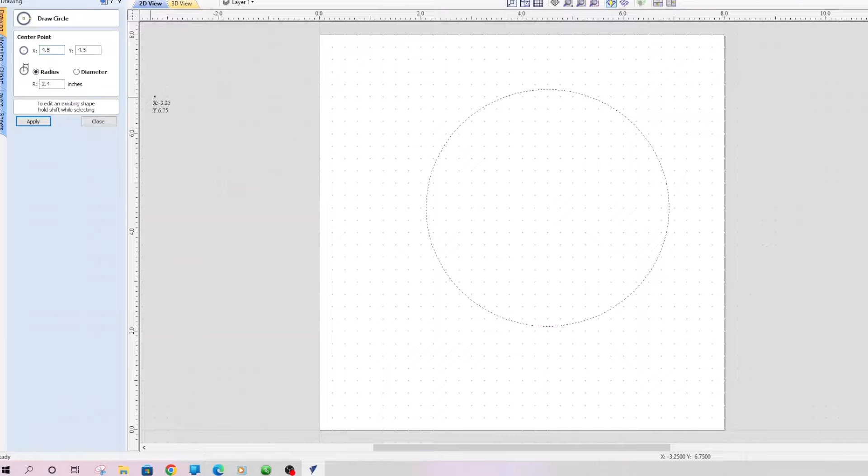Okay, so now once we have that, we have a series of tools here, and I'm going to do a different video on how to use the line tool, the arc, the curve tool, but let's go ahead and just start with a circle. What I can do is I can come out here and click and drag, and now you can manually type in exactly where you want it to go if you want to. So 4.5 tab 4.5, that's the center point. Actually it should have been 4 because we're not dealing with 9 inches, we're dealing with 8 inches.

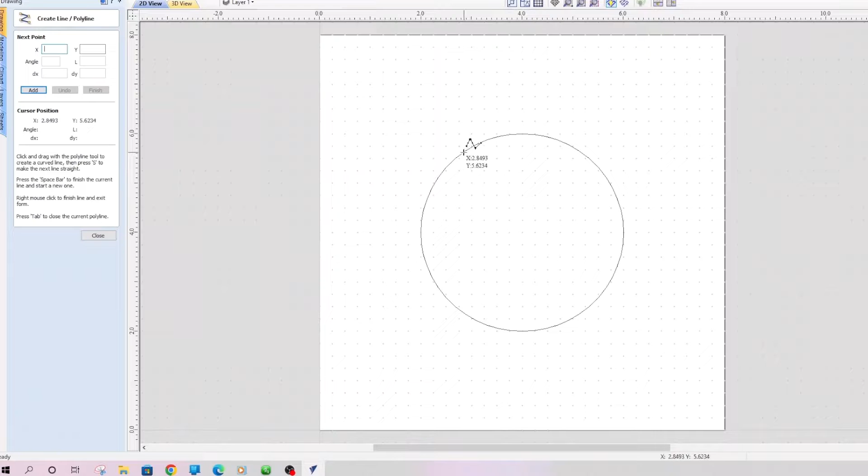Radius 2.4 inches. Let's say we wanted it to be 4 inches. The radius, no, I'm sorry, 2 inches. I was thinking diameter. So let's set the radius to 2 inches. There you go. It's a good coaster size right there. So I apply that and we close that. All right, so here we go. Now, if we wanted to, we can move it around. And there are other tools that we can use to intersect if we wanted to. For example, let's do the polyline. If I wanted to come in here and do something like this, I could.

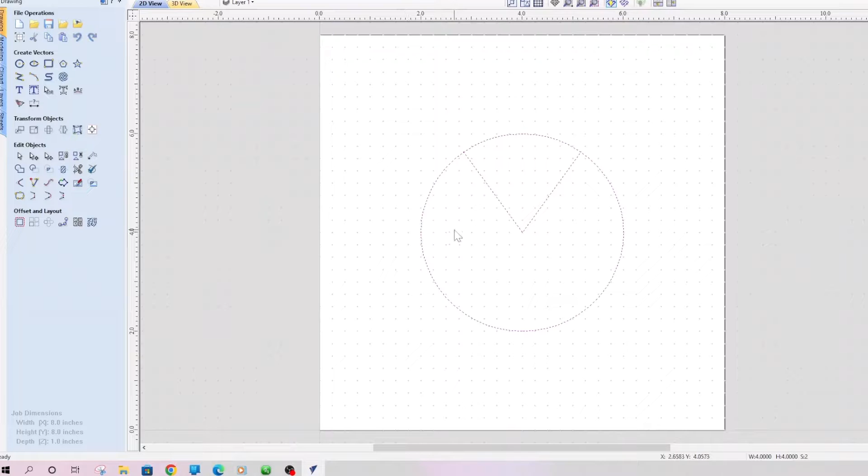Then I can actually come in and see, do I want to weld it together? I'm still getting used to some of these settings, so I'm not going to go deep into many of these. But if we did that weld right there, nope, that's not what I wanted. I want to get rid of that. I'll look that up, I'm not worried about that right now. I'm still fairly new to this software.

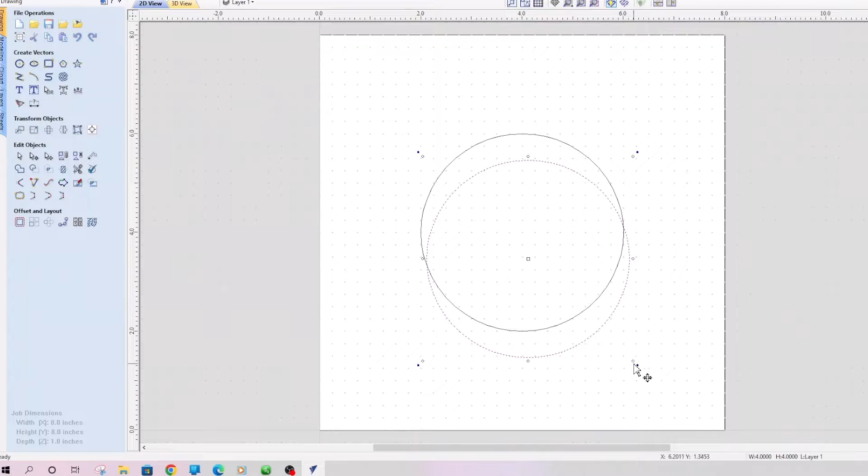So anyway, let's just go ahead and go with our coaster. Let's suppose I wanted that coaster to have a little bit of a lip to it. What I'm going to do is just copy and paste that. Now we actually have two coasters. And what I'm going to do now is resize that a little bit, make it just a little bit smaller, and move it into place.

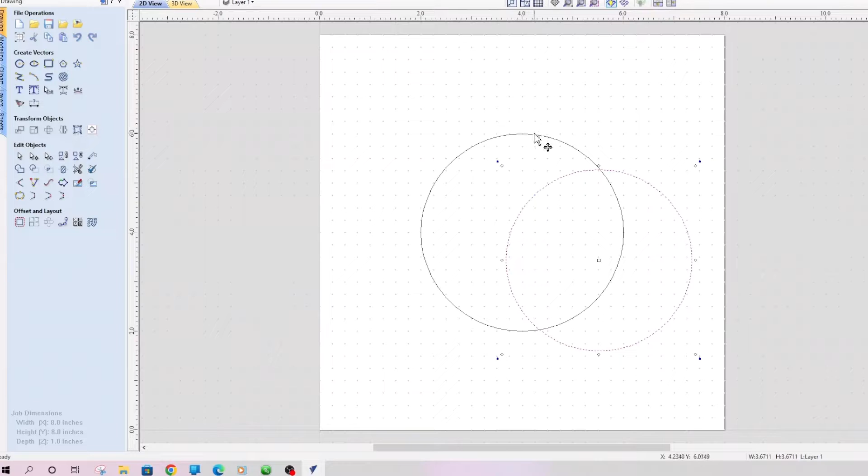Now here's a handy dandy thing for you. Number one, I'm using my arrow key to move stuff around, and that's nice because you can move it very precisely. Let me go ahead and select this circle, and I'm going to put that right in the center, and drag another guide down here also in the center, so that shows the dead center of it.

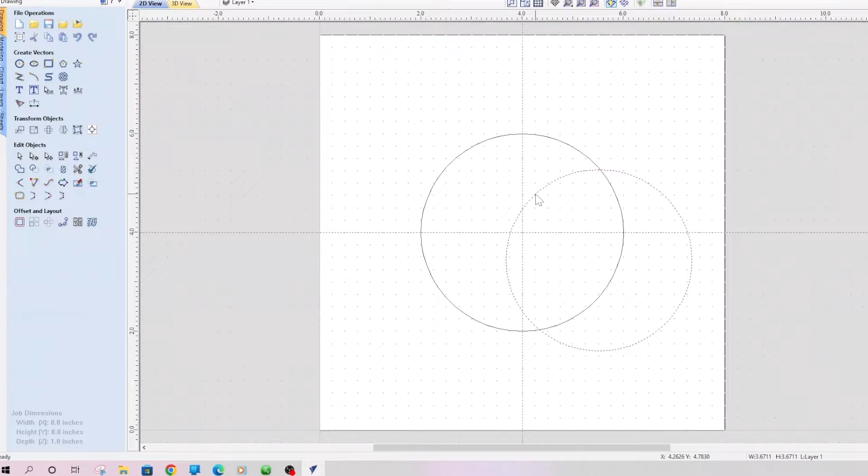So now I can actually grab this one. Let me manually just move it in here. Oh, I know what it is, I had the wrong tool selected, I believe. There we go, move it right in there. So now we actually have two circles that are totally centered.

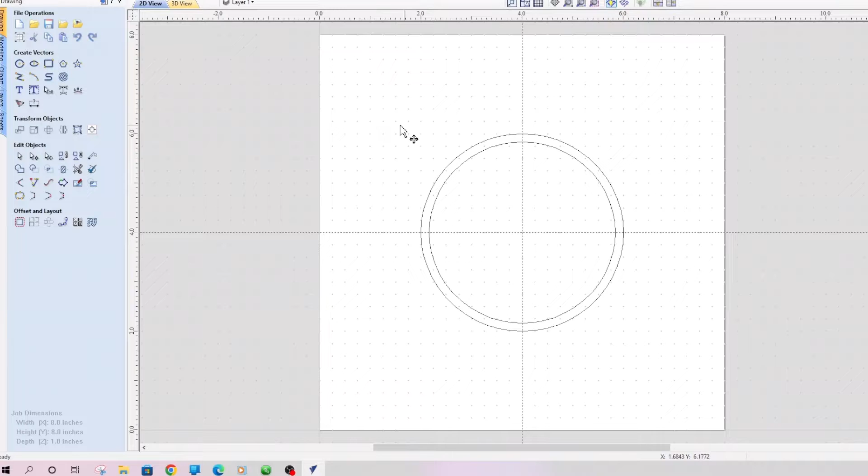All right, and we're just going to do a simple coaster. So to go into 3D view, we see absolutely nothing. So once we have our design done, and this is a pretty amazing design, I know you're impressed. Try to contain yourselves, people.

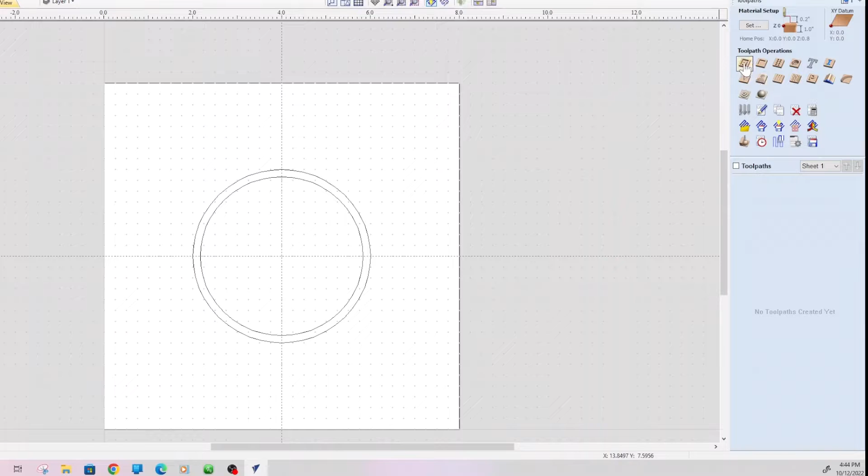Now we're going to go into the material setup. So the CAM side, we've done the CAD side, now we're going to do the CAM side. How do we want to do it? What do we actually want to do with it? If we wanted to make a pocket, we could do that, so the pocket is actually going to cut out a hole. And because this is a circle with no real tight corners, I can just as easily use a 1/4 inch end mill.

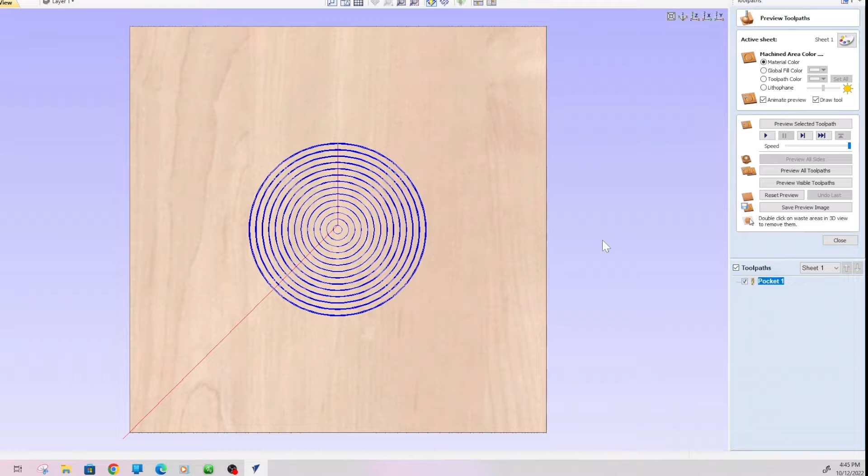So I'm going to go ahead and select that one, and I already selected a pocket toolpath, and let me select that inside. Then I'm going to calculate, and there we go. So if I go ahead and preview this, it actually cuts in, and then we can resize it and see. Now let's go back in there and edit that and see what we actually did.

What it does is it has 4 passes. So if I come in here and edit the passes, it's a 1/4 inch end mill going, excuse me, 1/2 inch deep. That's a coaster, I don't want it to go 1/2 inch deep. I only want it to go maybe, let's say, 0.125, 1/8 of an inch deep. So I'm going to change that, and then we'll take a look at these passes.

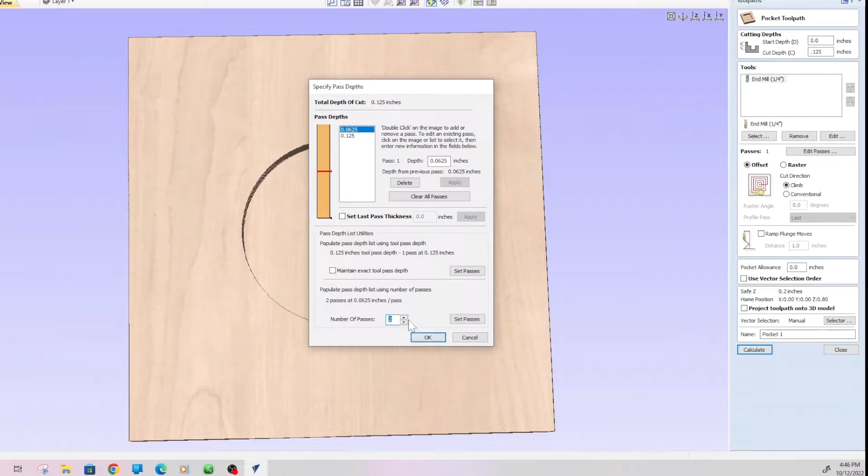By default, this 1/4 inch end mill is going to go 1/8 of an inch per pass. So if we wanted to do it in multiple passes, we could, but if it's a 1/4 inch end mill, 1/8 of an inch I think is more than fine, we can easily do that in one pass. So there we go. We can set this to be offset or raster; offset's fine since we're only doing one pass. That's all we got there. So let's go ahead and take a look, see if we want to adjust anything else here.

2 flutes, pass depth. By default, it's going to go down 1/8 of an inch, and the step over is going to be 1/8 of an inch. Basically, the step over is how far after it makes a pass, it's going to go over and start making another pass - how much is it going to step into the wood in that next pass. It's generally not a good idea, from everything I've read and understand, to go more than half the size of the bit. Since this is a 1/4 inch bit, 1/8 of an inch or 50% would be really what you want to do.

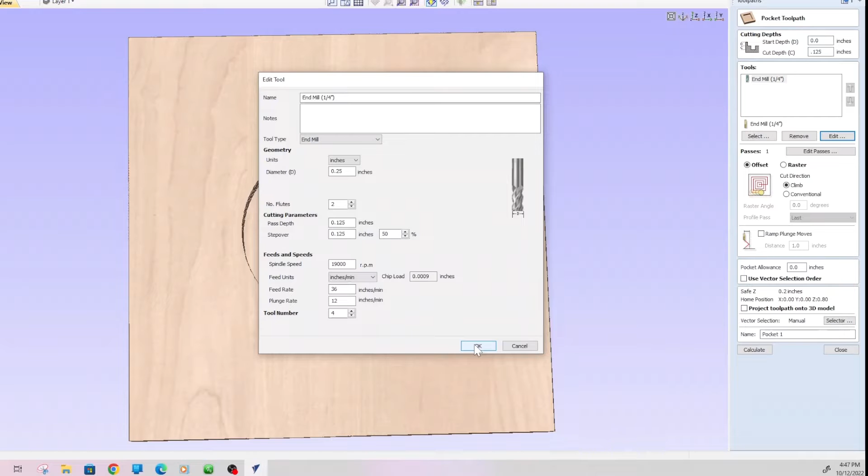It gives you a default spindle speed, feed rate, plunge rate, and it pulls that based on the type of material that you set and the type of bit that you're using. So I generally leave those alone. I don't know enough about them to be able to override them, and I don't want to break a bit or cause damage to my CNC because I decided to act like I was smarter than I am and make a change there. So click OK, and let's go ahead and calculate that.

Now what you'll notice is that, man, that's still awful deep. Is it just - oh wait, you've got to reset the preview. So before you go to preview it again, you have to reset that preview. That gets rid of the previous one. I always forget that. There we go. So now we can see that it's only 1/8 of an inch deep.

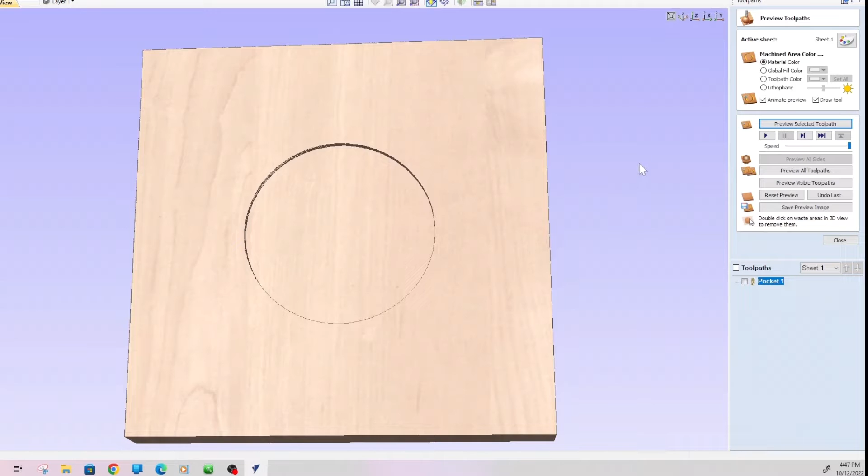Okay, but what I also want to do is cut it out. Since it is a circle, I want to go ahead and use my CNC to cut out my coaster. So what I'm going to do next is close out of this, select the outside, and now I'm going to do a profile toolpath.

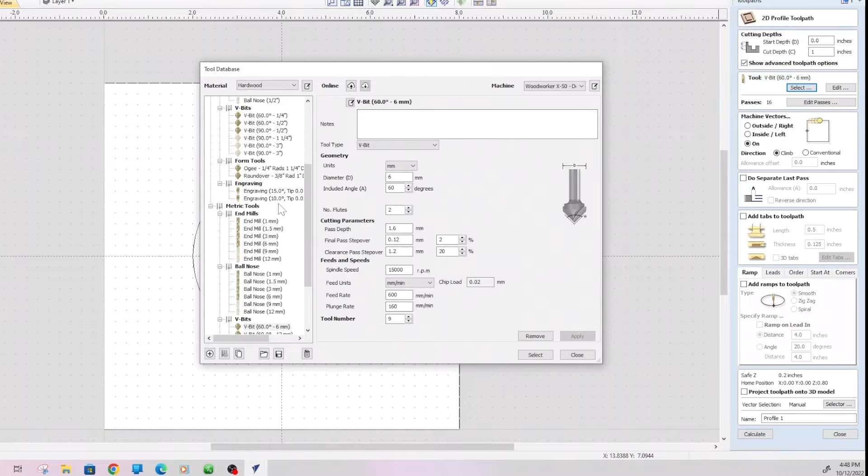Now the profile is not going to cut a pocket like we just saw. It's actually going to cut along the line. So for this one, the cut depth, since we are going to be cutting it out - I normally wouldn't have a 1-inch coaster, but I think that's what I designated - so the cut depth is going to be 1 inch. I'm not going to use a V-bit, that's for sure. So I'm still going to use my 1/4 inch end mill.

And notice how it has 8 passes. I don't think we need 8 passes. I'm just going to change it to 4 passes. That should be fine. So that's going to have 4 passes. That's going to speed it up a little bit.

And do we want to go right on the line? Do we want to go inside or outside? I think I want to go outside the line, because what I want it to do is keep that line there, but I want it to cut out the coaster. All right, so it's going to go all the way through.

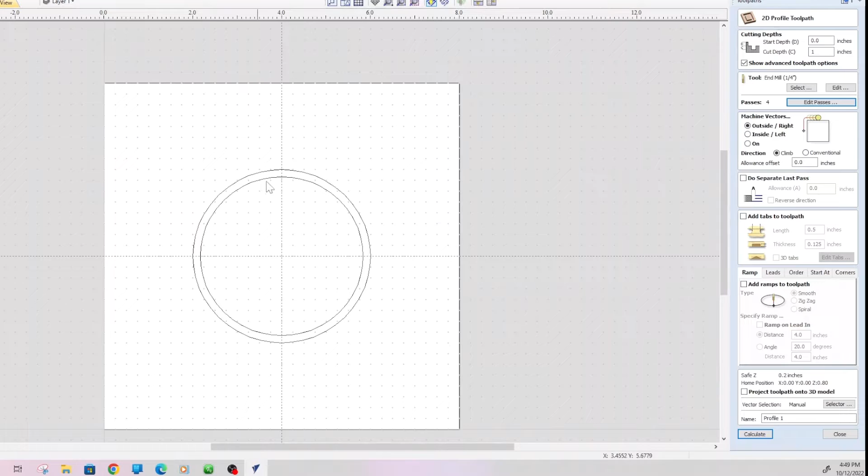And let's see, add ramps - we don't need to. You can add tabs if you want to. Since we are cutting through it, you're going to need a way to hold your coaster in place. So if you want to add tabs, you can. Typically what I do is I'll use the old CA glue and tape method. If you've watched any of my other videos, you've probably watched me do that. The entire piece is going to be held down onto my spoil board anyway, so even if I cut all the way through it, it's not a big deal. So I'm not going to add any tabs. In my opinion, tabs is just another piece of work.

So then once you're done, you've got to cut those tabs and sand everything. I like just using a piece of tape. It's not that expensive, and it saves time.

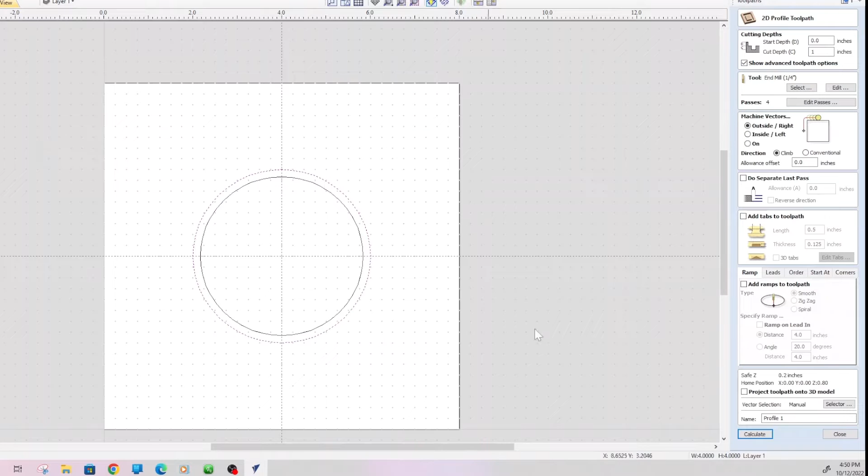So I'm going to go ahead and calculate that. No suitable vectors are selected. So let me select that and then calculate, and you'll see it shows it right there.

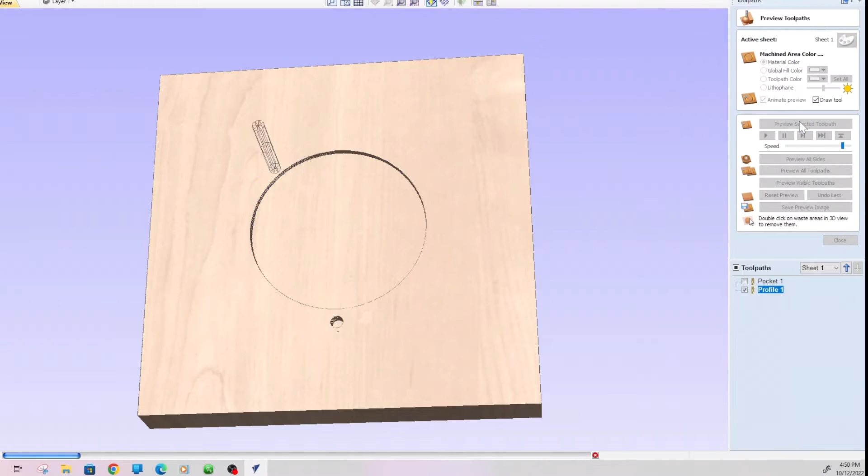Let's go ahead and notice how it's still got the other one in there, right, so it's still got our pocket there. So if I go ahead and preview this one, I'm going to slow it down just a little bit. Preview selected, notice how it goes right through, and it shows us that it does go right through. All right, so now we have our pocket, and we've also cut out our coaster.

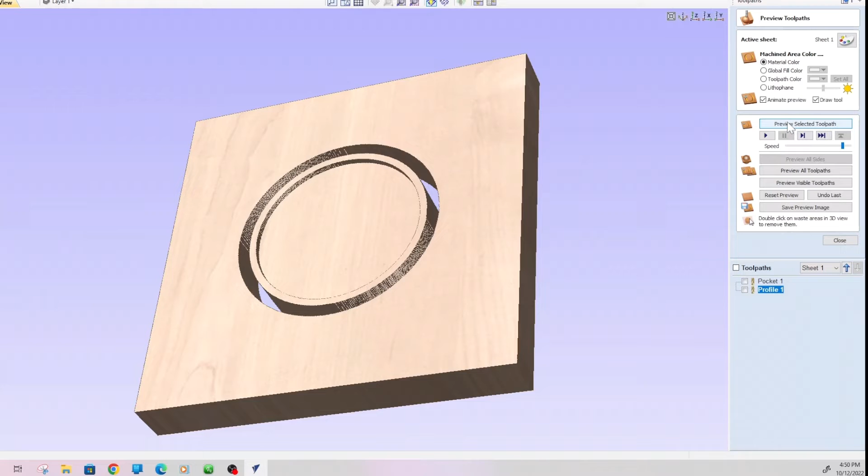Now, I really would not have an inch thick coaster. I'd probably resaw it, if I had an inch thick board, down to 1/2 inch. I've actually got a video on how you can resaw with a table saw. I'll link it in the description and put it right up in the info card in the top right hand corner there. So once we're done there, all we have to do is close this.

Now, what I love about VCarve, and one of the things that really made me pull the trigger on it, is that we can generate this job sheet right here, and I'm just going to save it in my CNC builds. And what that does is give us all those settings.

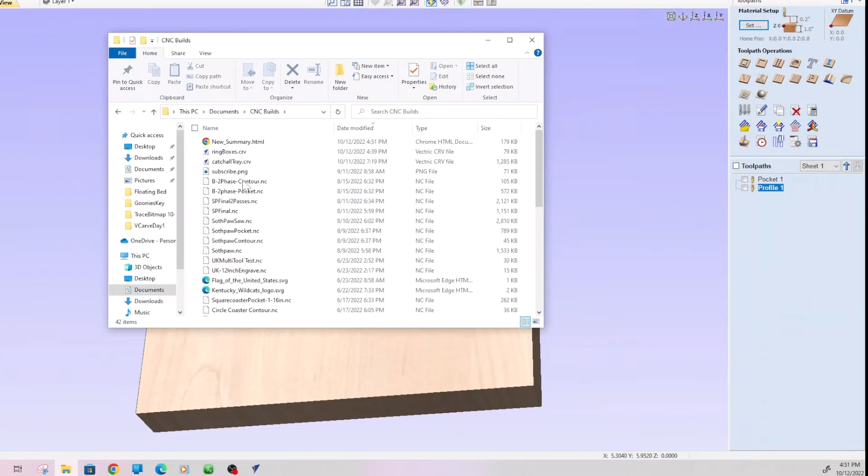Where did I have that? Document, CNC builds, new summary. Yeah, there we go. Open that up, and here you go. So this is our job sheet, so we can see exactly what our settings are supposed to be, which bits we're using, what order, approximately how long it's going to take, and we're ready to go there. Now you don't have to do that, but I like doing that.

Okay, so we're done previewing. Now we're going to go ahead and save the toolpaths. I'm going to save them to multiple files.

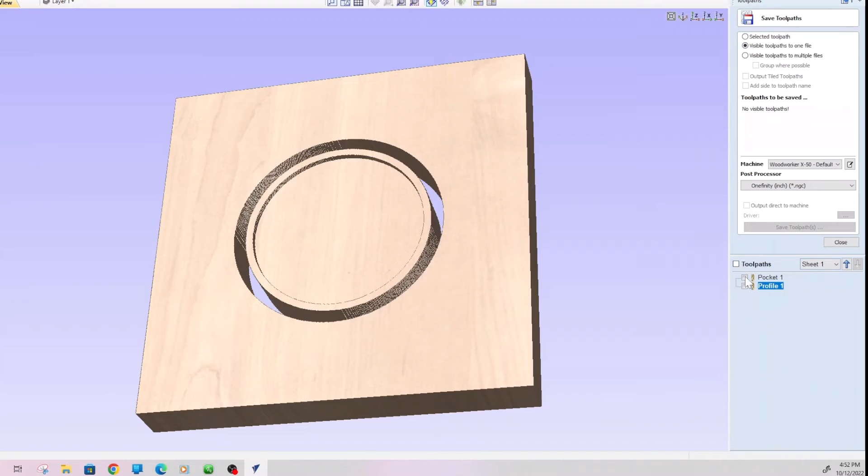I prefer, since I have to change out—actually it's not a bit change. So this one, yes, since they're both 1/4 inch, we should be able to save both of them to one file. So let me go ahead and select both of those. Since they're both 1/4 inch bits, we don't have to do any material changes or any bit changes. So we can just go ahead and save that.

So I'm going to go ahead and save that toolpath. The machine that I have designated is my X50, which when you install VCarve, it'll ask you what your machine is, and there you go. So now go ahead and save that toolpath.

It's going to save it as an NGC file. I assume that stands for new G code, nasty G code, I don't know. We can figure out what that N is. I'll be perfectly honest, I'm not sure. So I'm going to go ahead and save it in there. If I wanted to make another folder, I could. Save that, and we are good to go.

So now we have our G code ready to go. So there we go, that is the process from beginning to end.

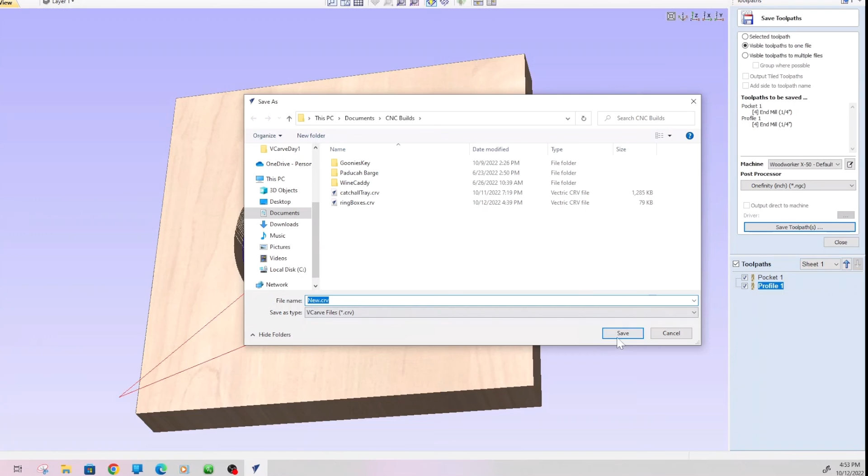The last thing that we want to do is save this, and we always want to save it as a CRV file so that we can open it up and make any changes to it. Let's suppose you wanted to save it and then later on customize it, put a custom logo, somebody's name in there, anything like that. We can easily do that. So there you go.

That's the process from start to finish on how to create a new document in VCarve Pro and take it all the way to completion and exporting our G code.